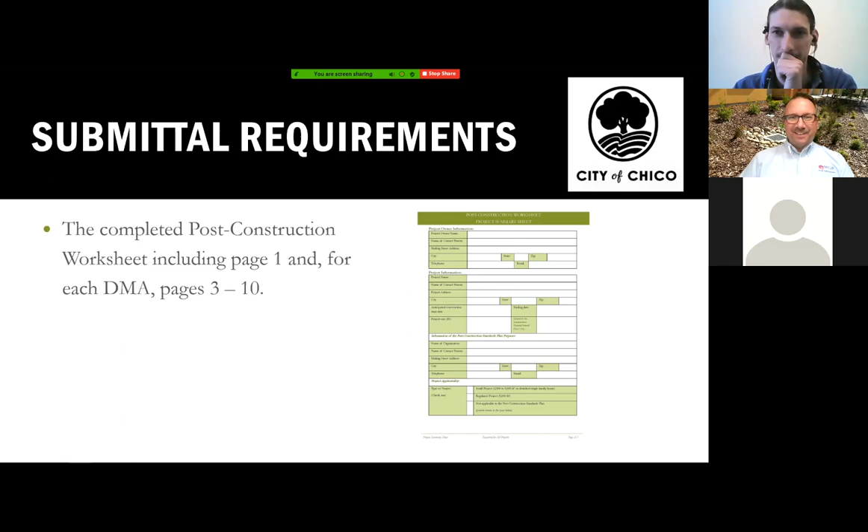Let's see. Maybe drag that over. All right, where did it go? I practiced all this before. Let me find it. Here it is. It's just hiding behind the screen. All right, Jonah, can you see that okay? Yes, I do. All right, good.

So there's the different sections of this, and one of the things we ask is just complete this form completely, and I'll show you there what might be applicable, what's not applicable. But sometimes we do get this worksheet submitted without this front summary sheet. So it's really important to get this for every project, whether you're a small or a regulated project, so that we know who to contact and some basic information about the project.

So we only need one of these. Later on, you're going to see that there's a section of this form that we need for each DMA. But this front project summary sheet is just for each project. And then check which type of project you are. Are you a small? Well, if you're a small, that means you're under 5,000 square feet of new or replaced impervious surface. And we will be reviewing that differently than a regulated project, which is 5,000 square feet or more of new or replaced impervious surface.

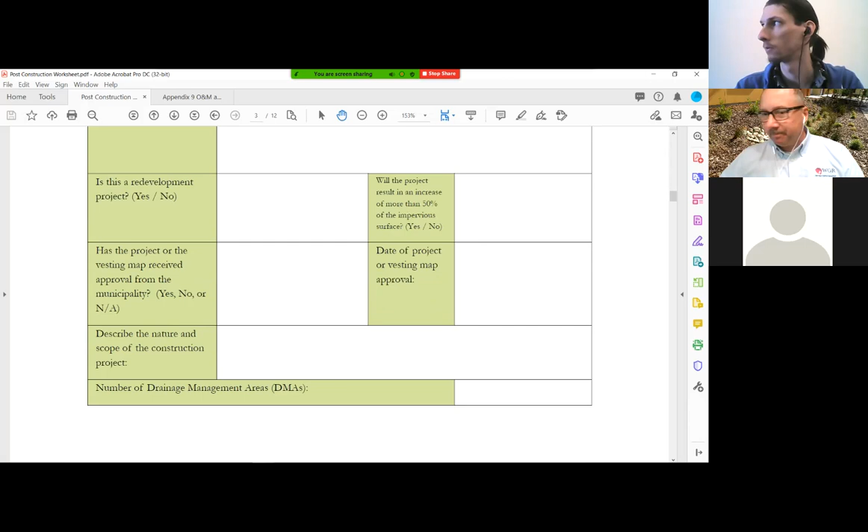And we'll talk about this 50% redevelopment rule here in a moment, and then just provide basic information. But another thing here is, how many DMAs do you have, drainage management areas? Excuse me.

So the next section of the worksheet is for those small projects. So as I mentioned, if you're between 2,500 square feet and 5,000 square feet of new or replaced impervious surface, then you are a small. And that's treated differently. It's less onerous. Basically, you just have to pick one of these design measures, and it will almost always be tree planting because trees are required in most projects.

And then you need to use that calculator, that water balance calculator that was developed by the State Water Board. It's Appendix 5 of the Post-Construction Standards Plan, and basically just quantify the reduction. But one of the things about this is, at this time, the municipal stormwater permit that the city is subject to does not require a goal to be met for the small project.

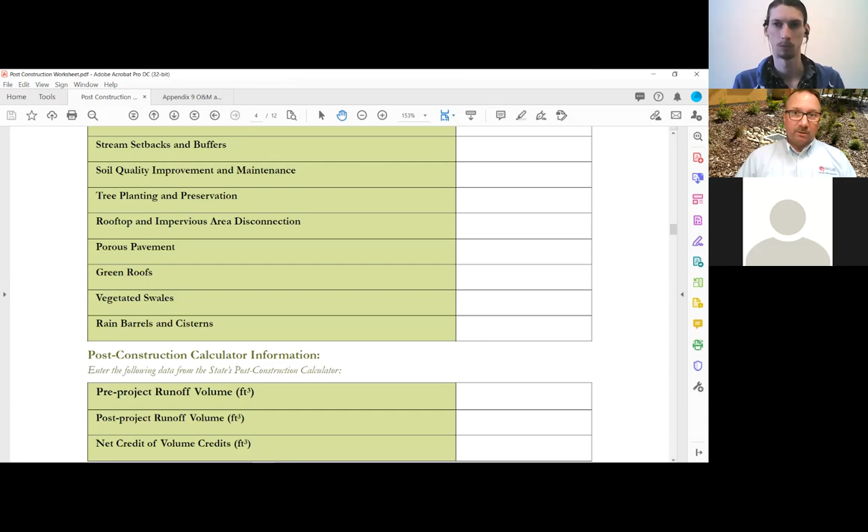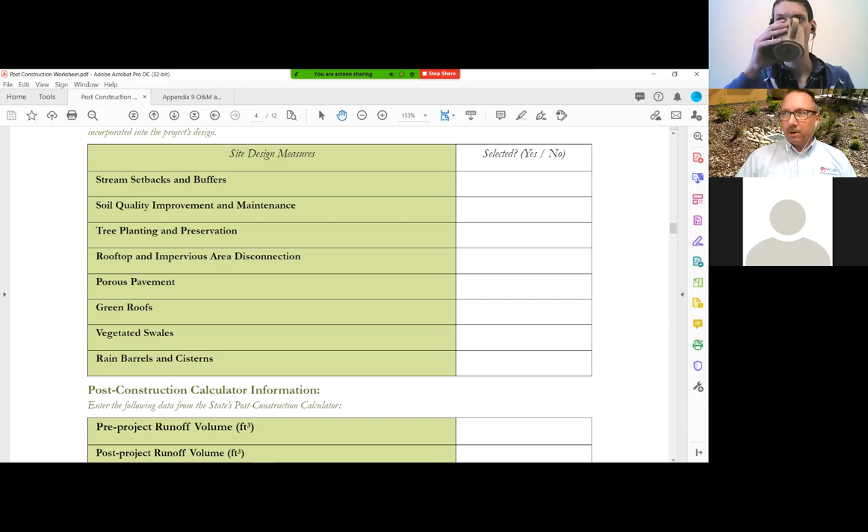It basically just says pick a low impact development measure, one of these site design measures, pick one of them, quantify it, and give us the data for that quantification. But there's no goal to be met. As opposed to if you've used that very same calculator as a part of the State Water Board's construction general permit, and it's now incorporated into SMARTS. There is a goal to be met with that one, but for the small projects under the City of Chico's program, for their permit, you just have to pick one of those measures and quantify it.

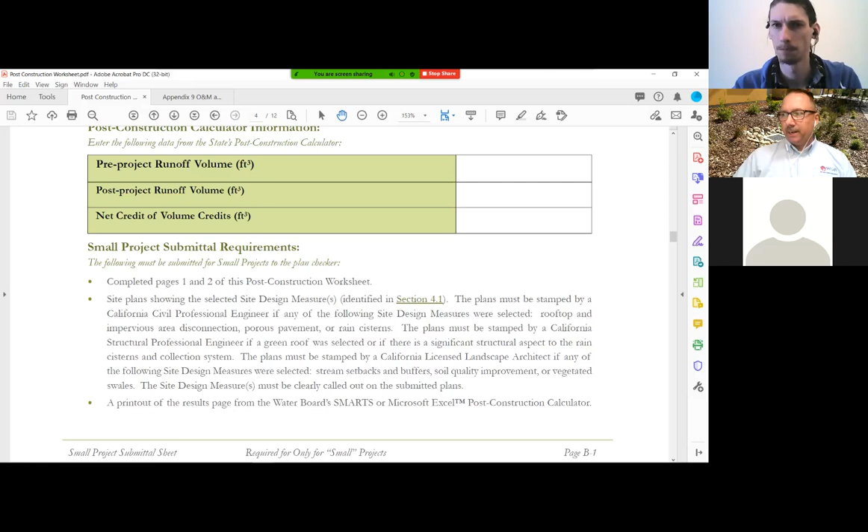And right here, we summarize what's needed to meet that submittal. But basically, this sheet, that previous project information sheet, and then a printout of that water balance calculator is all we need for a small project. And I think typically we don't review small projects. They're easy enough where Rich and his staff are reviewing those, so they don't even come to us.

Regulated projects, though, is where we want to spend most of our attention today. And so again, you complete that first page or two of basic site information, project information, but each drainage management area then is going to need this next section. So if you only have one DMA, then you just need one set. But sometimes, in fact, I think we're going to show you an example of one that has 14 DMAs. Then I need 14 sets of this next section.

So you need to give us the name of the DMA, the square footage in that DMA, and then each one of these subsections are applied to that DMA. So here's another area where we sometimes see some confusion. It's about these source controls. Remember, this is for that particular DMA, and it may change from DMA to DMA at a project.

For example, if we got an apartment complex going in, only one or maybe a couple of the DMAs will have the refuse area where the trash enclosure is located. So if it's in that DMA, then you would select yes for that one. If a certain DMA has no landscaping in it, then you would not select yes there.

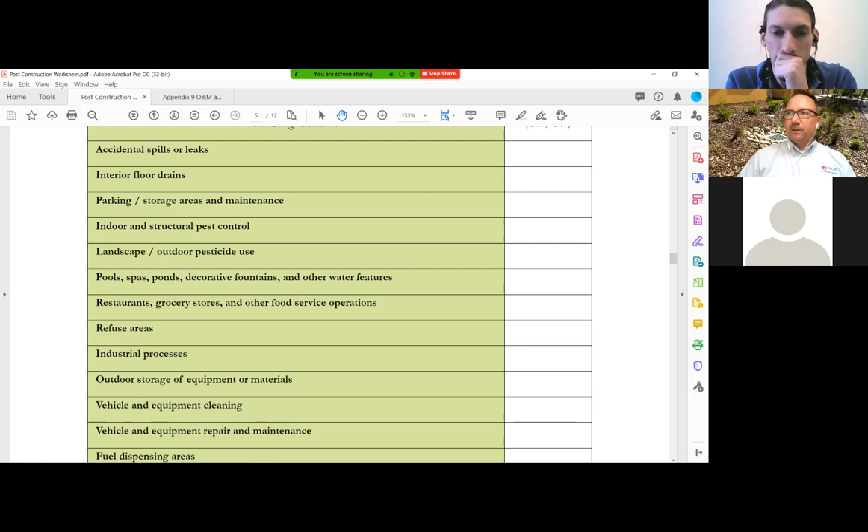Accidental spills or leaks right here. You know, how does that go into a design? Of course, a spill could happen anywhere at any time, really. So we don't get too over the top concerned about this.

If you have a large parking area, and it's feeding into an underground infiltration device, then maybe we're concerned about a spill of fuel or oil getting into the infiltration device, and we'd like to see some sort of spill control for that. Your design measure might be as simple as having a spill kit available, especially for a commercial or industrial site, or a spill resource closet built into it.

But we don't typically get too crazy about our reviews on that type of thing, especially if it's more like an ongoing activity thing. Interior floor drains, the only thing I'm looking at is that they're not tied into the stormwater system, but that would be against code anyways, typically speaking. Interior floor drains aren't to tie into a stormwater system. Sanitary sewer system, that's fine, or a wastewater system, that's fine, but not into the storm system.

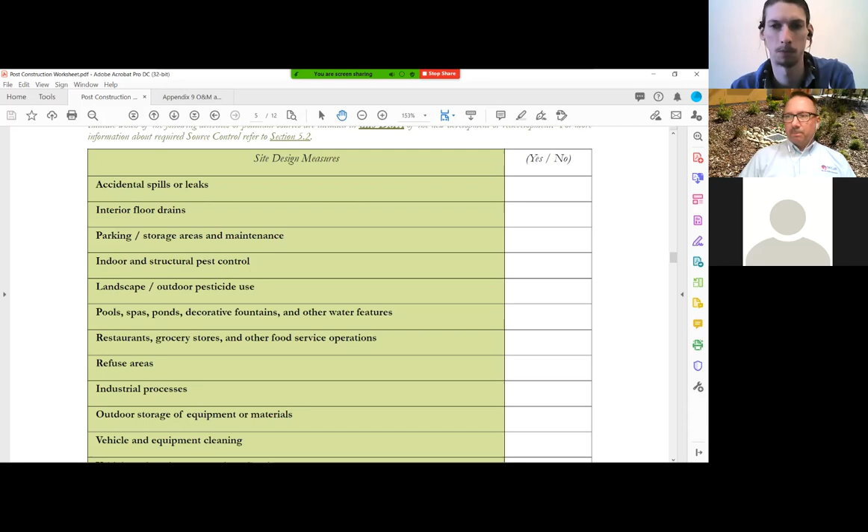If you have a parking area, then you're selecting that. Again, pest control, to me, that's more activity based. So typically, I'm not going to be too concerned whether you check that or not. If you have a pool, a spa, or a pond as a part of the design, then you want to check that. Or if you have a food service type of operation in a particular DMA.

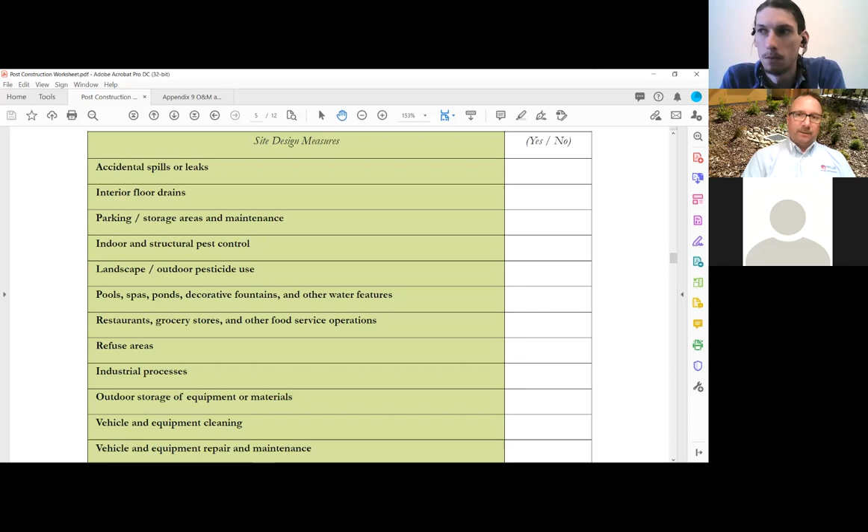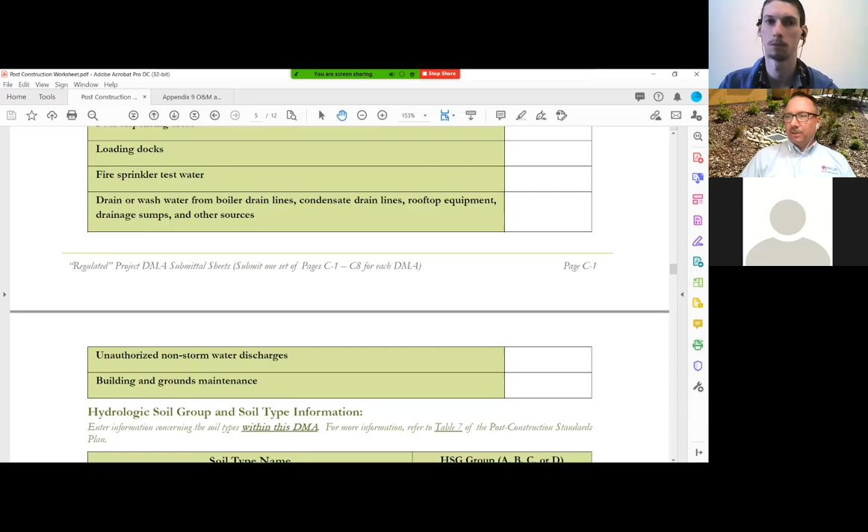So sometimes we'll review gasoline stations that have a convenience store with a food service part of it. If that C-store / food service area is in a certain DMA, then you would select it for that one. But if you have another DMA that is mostly the outward landscaping areas, then you would not select it for that DMA. But that's kind of our concept on these. I won't get into any more of that unless you have specific questions.

The next section that's really important to select is your soil type, your hydrologic soil group, or HSG. Basically, we want to see if it's an A, B, C, or D, or mixed soil types on your site. If you have one soil type, then we need to know that. If there's multiple soil types, we need to know that, especially if they have different HSG types.

So if part of the site is A and then part of it is C or D, that's going to be something we really take a look at, because of course we're going to want to see the infiltration or bioretention happening in the A type soils on that site rather than the C or D. And that's because the permit requires us to have infiltration occurring there.

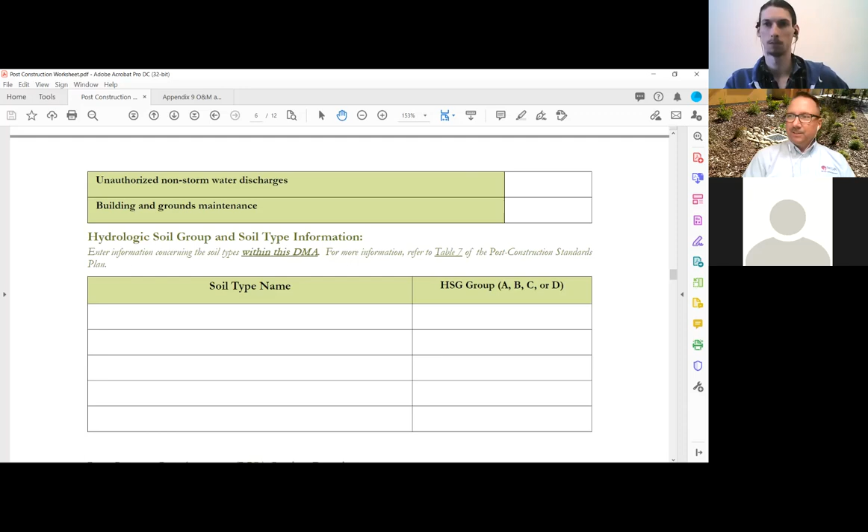Now, when this permit came out, it's been out for a while now, maybe 8 years plus, we thought this was going to be more of a big deal than it was. To be honest, most of the reviews that we've done, the sites either all have the same HSG soil types, or the developers already put the infiltration into the higher infiltration area. So I have not found this to be an issue in most of the projects that we review.

Now, another area that needs to be handled on a per DMA basis are the 9 LID, or what I like to say, essay questions. This comes right out of the permit. We were obligated by the permit to address these for new and redevelopment projects that are regulated or over 5,000 square feet. And so from the very beginning, we felt it was just best to deal with it by saying, okay, how are you addressing this?

Again, I thought this would be a bigger issue in the reviews, but we have found it not to be a big deal at all. I don't know if I have rejected hardly any projects due to any of it. Sometimes there might be a question here about soil type. Sometimes it might be, well, I'm seeing something slightly different on the web soil survey than what you're saying here. Could you clarify?

But typically, I haven't seen a lot of projects with problems answering these 9 questions adequately or with any real challenges in meeting it. So I won't spend a lot of time this morning covering this, just because we haven't seen it be a problem, unless you have a specific question.

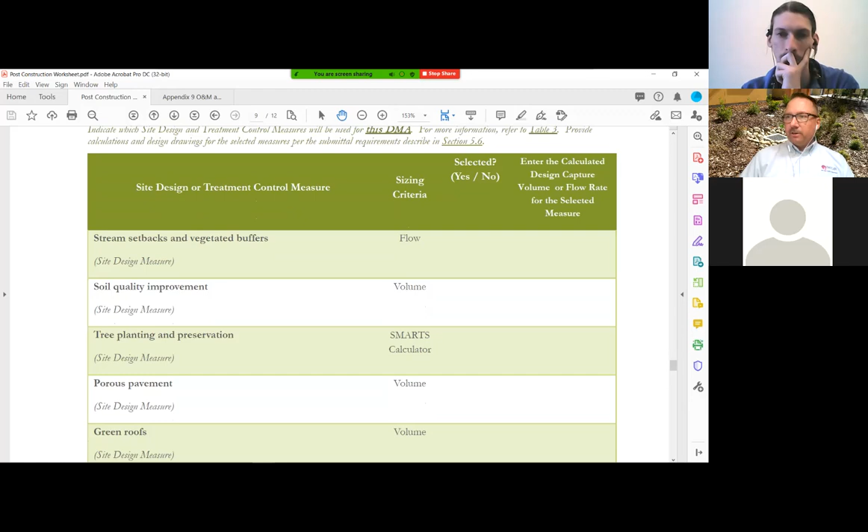And then this next section is where you select your treatment control measures. And you'll notice that under sizing criteria, we have flow or volume, or in some cases, both. I think down here for infiltration trenches or flow through planters. It's either or. That sizing criteria we refer to in the post-construction standards plan as a storm design volume, or SDV, or storm design flow rate, SDF.

We'll talk about that more in a moment, but most projects we're looking at the volume. Only if we're doing a flow through type of a situation, and we had one recently, in fact, I'm going to show that here in a moment, it's going to be SDF, which is 0.2 inches per hour will be our treatment goal.

Now, under tree planting, we show that as being the SMARTS calculator, but it's also built into our volumetric calculator. So if you're calculating the volume goal, we ask a question about tree planting, and that will build into that goal the credits that you get for existing and new trees within each DMA.

And then there are certain variations and exceptions, and we will spend some time looking at this this morning. In fact, a common one that we see. We'll talk about that in a moment. But if any of those apply, then you would want to indicate that for that DMA here. And then there's a list of the submittal requirements, which we're going to look at next. So let me get back to our

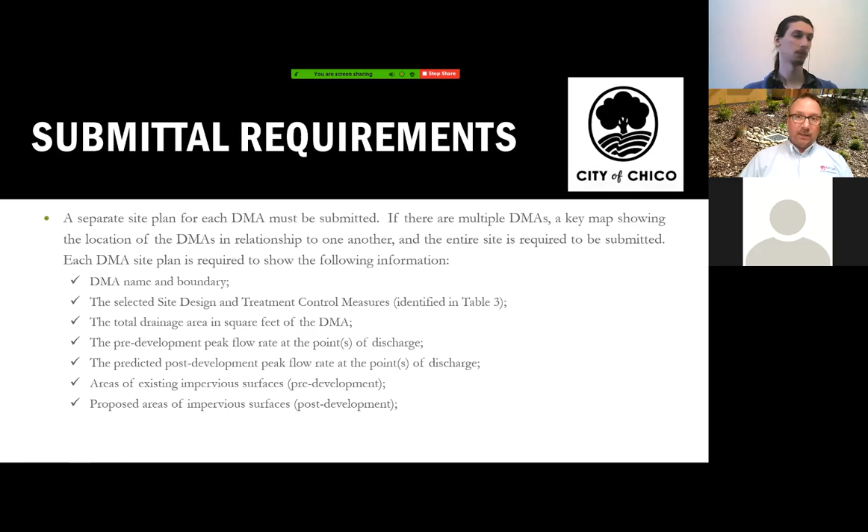Areas of existing impervious surfaces and proposed areas of impervious surfaces. Generally, that's not a problem. Usually that's pretty standard, but just make it clear so we can understand what's vegetated, what's impervious on your drawings, so that we can, in fact, it's helpful many times to include the areas on your drawings so that we can quickly validate it against your calculations provided.

Not too common, but it does happen, setbacks from creeks and wetlands or riparian habitats. And then show your existing topography and drainage patterns and your proposed topography and drainage patterns. Show your soil types. Again, that doesn't have to happen on the drawings themselves, but you do need to have information about that. And then show existing trees so that we can validate your credit, and new trees, and also areas to be protected.

Now, sometimes with the trees too, it might be helpful to submit a landscape plan with that. But if you do that, especially if you have multiple DMAs, make sure that the DMAs are drawn out on the landscaping plan, or you show the trees on the DMA plan, so that we can count up the number of trees within each DMA, both existing and new.

All right. And so your design drawings should just provide enough information so that we can see the area, so your plan view, but also your elevation, or more importantly, a cross section if you have a lot of underground structure going in. So if you have an infiltration trench going in there, I need to know the depth and the width of the trench, how much rock layer is in there, how much soil is on top of that, especially if it's a bioretention area, and how much ponding is on top of that.

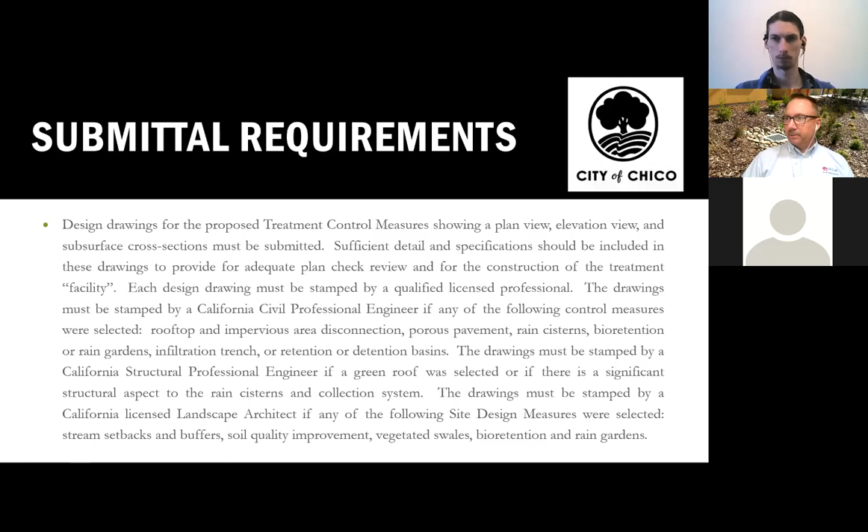And as far as the credits that we allow here, we basically took the same credits that the water board has on their water balance calculator used on SMARTS. Unfortunately, I can't really document where they got those values because SMARTS and the water board haven't really disclosed that, but we're using the same values that the state water board uses.

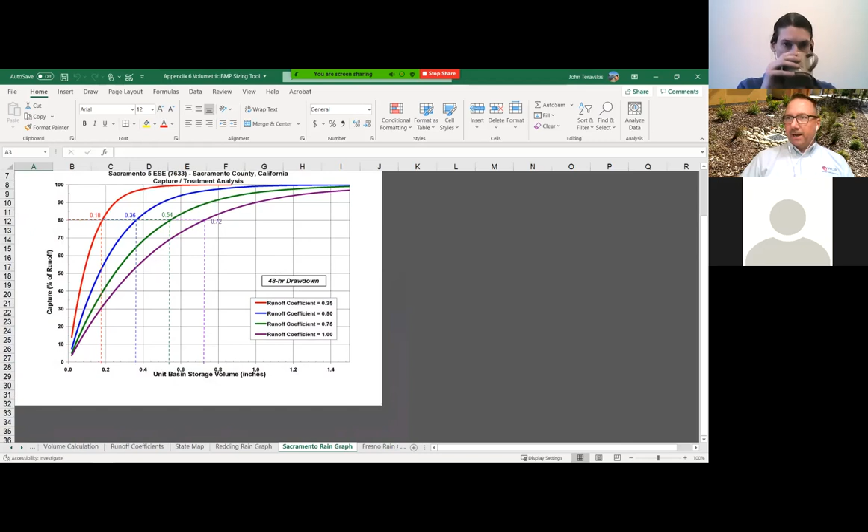Now, how this volumetric calculator works is it's based on weather data, and the process that's described in the city's municipal permit allowed a couple different approaches to be taken to determine this, and I'll go through that in a moment. But one of them was using weather data and using the 85th percentile storm. And what we noticed is that in the Central Valley, as we went from north to south, it was almost a linear relationship. And so we do give you some of the raw data, the Redding graph, the Sacramento graph, and then the Fresno graph. And as we looked at these 85th percentiles, it was almost a linear relationship.

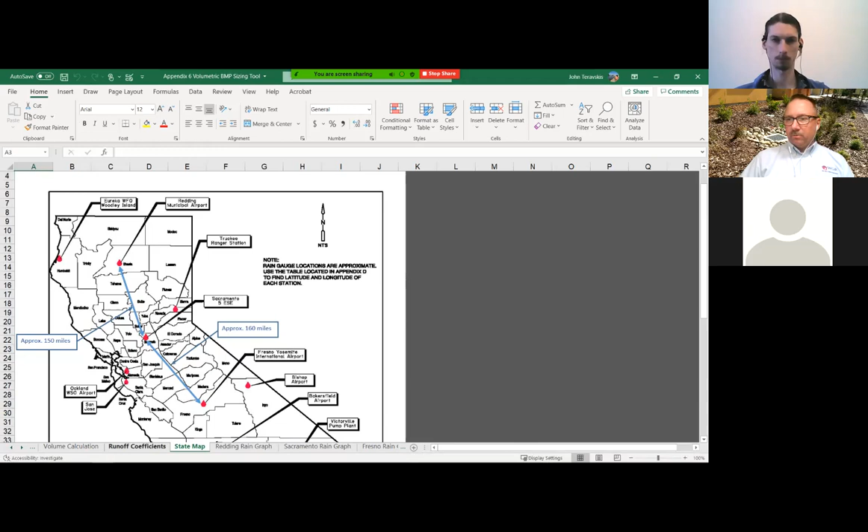And so what we did was we built that into the calculator based on your relative position north and south of Sacramento, kind of as the bird flies. Now, there's a certain tolerance to this. So 5, 10, even 20 miles isn't going to make much of a difference. So you just need to get close. So don't get too detailed about this. You can play around with it too and see it doesn't make much difference.

But a project occurring in Chico certainly has a different goal than a project occurring in Sacramento or one that's occurring in Fresno. And so you will designate your position, which for Chico will always be north, obviously, and your distance from Sacramento, and I'm blanking, but I want to say it's like 60 miles roughly north of Sacramento. And so you enter that in, and that's going to give us our percent of distance.

And basically what that's doing is going off of these runoff coefficients off of those curves that we were looking at. So you can see the linear transition for each runoff coefficient here with each of the weather stations, and we get our unit basin storage off of that based off of, let's say, this graph right here, unit basin storage for the different runoff coefficients. You can see where we're getting that. And you can see that Redding will have the highest, Fresno has the lowest, but we also have the 4 different curve numbers we're working with here.

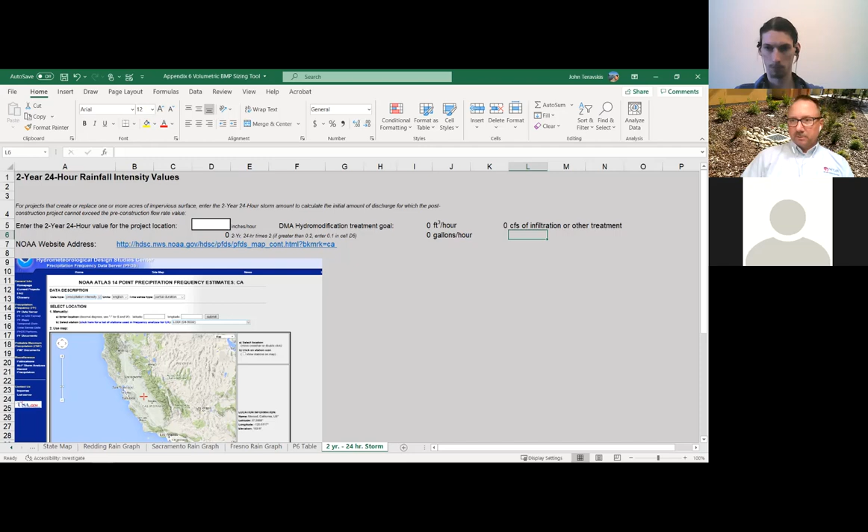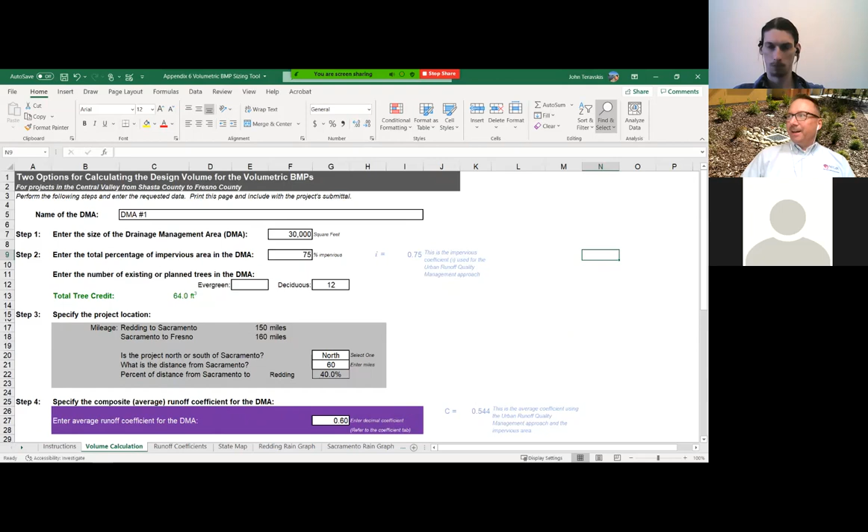But yeah, I'll look into that. I didn't know about that. I'll see if I can find another source or find out when it's going to be back online. All right, good. Let me go back to what we're looking for as far as submittal requirements. So

how we prepared this post-construction standards plan guidance is basically we put the onus on the professional engineer. I'm just there to make sure that all the boxes that need to be checked are checked, that your application is complete, that I'm getting the same number for the SDV as you are, or the SDF, and that your calculations and your drawings are supporting that.

But, you know, I typically will not question the professional engineer if you say that, for example, the voids in your soil or your rock is 40%, and you've stamped that, then we're going with 40%. The only time I'll question it is if it seems to be completely in error or not supported by other information, or it's a typo or something like that. But if it's within the realm of reason, you're the one stamping it, you're the professional signing it, we're going to go with that for that type of thing.

So typically, I'm not questioning your design. I'm just looking at what you've submitted and making sure that it is adding up, both what's on the drawings, what's in the calculations, and that you've provided us all the information that we need.

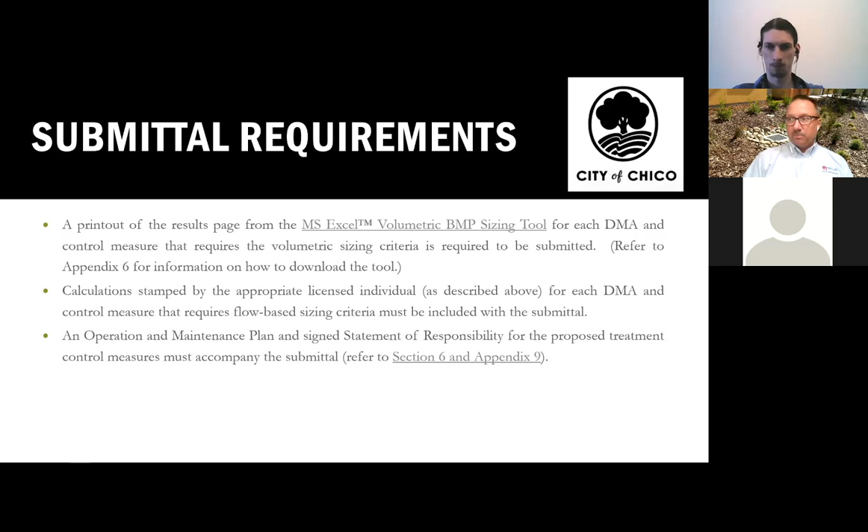And then one of the other things we need, as we'll talk about in a moment, that's often forgotten or not submitted, is the operation and maintenance plan and the statement of responsibility. And you can see that here, right here. So it's Appendix 9, and it's a form as well. And then the statement of responsibility.

Now, sometimes the statement of responsibility does not need to actually be submitted, and that's for a case where the city is going to have the responsibility for the maintenance of that, or going to take ownership of that treatment device, especially if it is going to be deeded over to the city or is in the city right-of-way. Then a maintenance agreement, or a maintenance district, is going to be applied to that; that will typically be the case. You just need to let us know that. I will verify that with Rich, and then we'll consider that section met.

All right. So let's talk about the review criteria now. So as I mentioned, my first job is just to look and see if the application is complete. Do I have all the pieces I need to be able to evaluate it? Was the O&M plan submitted? You are charged for each of these, and maybe Rich can talk more about that. I don't know all the details of how that works. But you're charged for each review, or at least we charge Rich for each review.

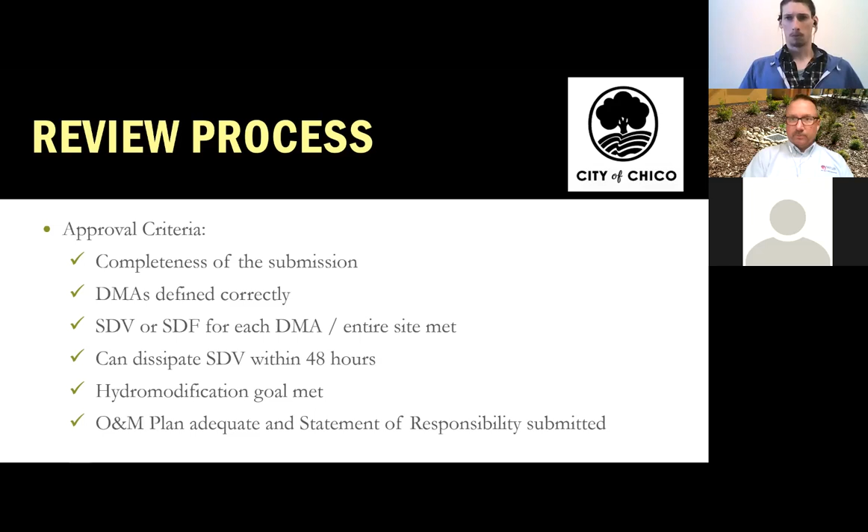Then the next thing we'll check is which type of sizing criteria was used for each DMA. Now, here's another reason why a DMA might get separated. One treatment system, a bioretention cell, for example, is going to be typically volumetric, whereas maybe the roof drain going to the north side is going into a grassy swale, and that's typically flow based, so it's going to be an SDF. And so if you're using different design criteria, that is definitely going to mean it's two different DMAs. So we want to make sure that the SDV and SDF were appropriately chosen. I'm actually going to show you an interesting project today where they used both and both were met.

And then the other thing we're looking at is not just was it sized correctly, is the SDV being met or the SDF being met, but can that SDV dissipate within 48 hours? That's the goal. It needs to infiltrate or dissipate within 48 hours. Now, if there's soils that don't allow infiltration of the SDV in 48 hours, then you may use one of the alternate designs, which we'll talk about in a moment, which is identified in the plan, and which is usually a subdrain.

We'll also check to see if the hydromodification goal was required and if it was met, and that's like I was mentioning, 1 acre or more of impervious area being added, not replaced, but added. Then we're going to look at that 0.2 inches per hour, the peak flow rate for that 0.2 inches per hour pre and post, and the post can't exceed the pre. And then, of course, we're going to look at the O&M plan to make sure that it's adequate.

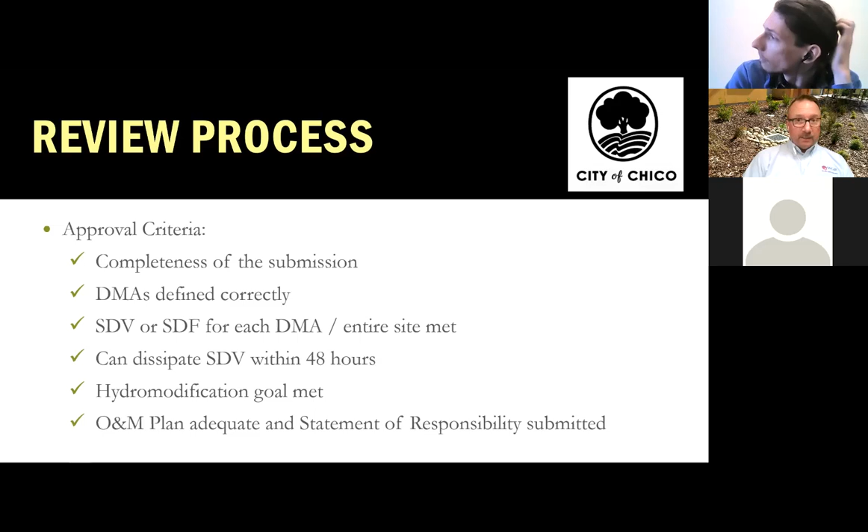Because how those plans and the statement of responsibility are used is that the city has a requirement that once a year, they need to send out a self-certification card, basically a postcard, to the owners of these devices to ask 3 questions. 1, are these treatment devices that were built into the project still there? 2, are you inspecting them as you said you would in your O&M plan? And 3, are they performing as designed? And as long as you answer yes, yes, yes, then that's good, and you won't see another card until next year.

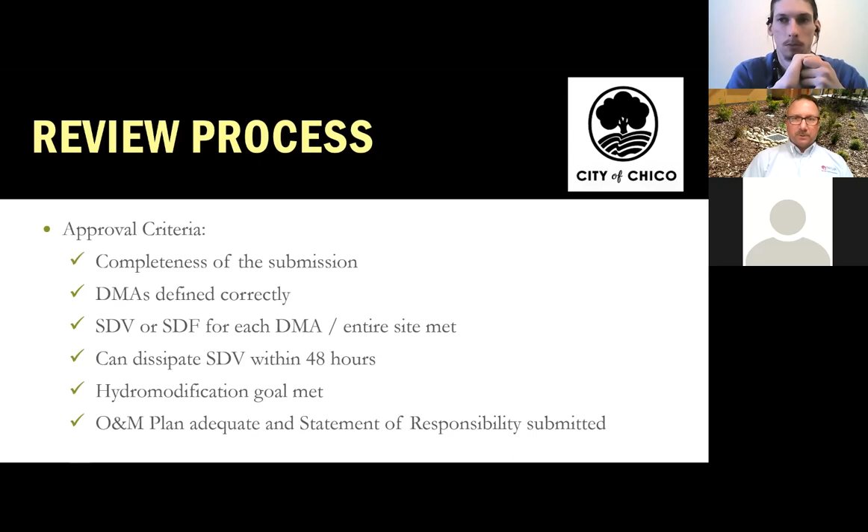But 20, 25 years down the road, maybe it starts to plug up. If that is the case, then it's going to be expected that the owner of that property take the maintenance that was spec'd out by the professional who designed it. We see it as real important to tell your clients basically the maintenance expectations. This isn't something that you just put in the ground and forget. Yeah, maybe you can forget about it for 5 years, a decade, or even more. But at some point, just like blacktop asphalt, you're going to have to replace it or maintain it or change it. So it will have a life expectancy, and that needs to be communicated to your client.

All right, so let's look at now 4 different reviews I do, and I want to just check on questions. Anybody have a question before we move on? All right, and let me double check how we're doing on time. All right, I think we're doing okay on time. Let's take a look at these. So again, if you have to sign off because of time, we are recording this, so you could always come back and watch a recorded version of this.

So let's look at an infiltration trench that had both SDV and SDF in it. This is a very recent project that we've been working on. Notice that it has 1 DMA. First off, let's take a look at how we do this documentation. For any submittal you get, you're going to get the spreadsheet submitted back to you with some basic information about your project. Plus, we're doing our own independent verification of your calculations, and hopefully we can come up with the same number that you did. Let me just explain some of the information that you'll see on here. So just some obvious basic information about your site.

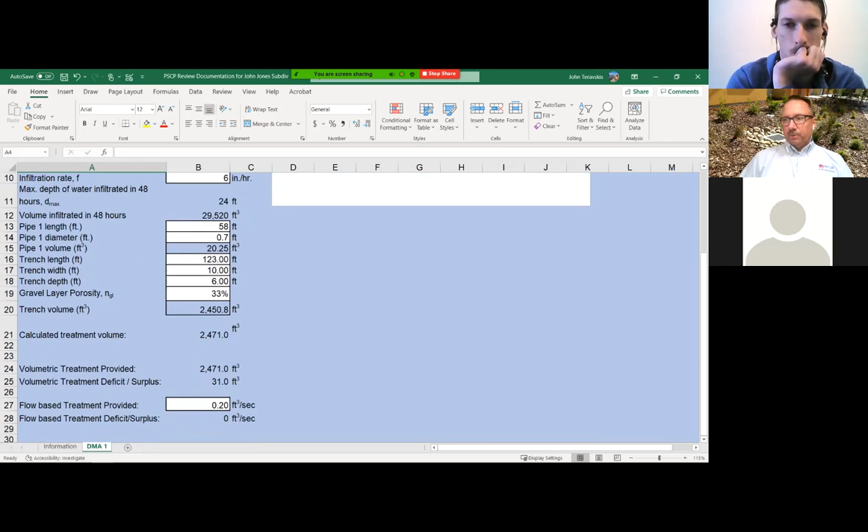They go, no, we were trying to do the SDF. And so I took their numbers, looked at what they were presenting, and again, they were just slightly off, even with the SDF. So that was kind of interesting because this was my first real live example where we were looking at both, and I was finding that both were correlating very similarly. So when they just slightly upsized their design, not only did they meet the SDF goal, they met the SDV goal too. So I actually calculated both here using the numbers they provided. And you can see here that the volumetric goal had a slight surplus, and the flow through was met. So that was kind of an interesting project.

So you will get this documentation returned to you with either how you met it, or if there's a question or a problem, I will typically highlight whatever cells are in question in red, and then you'll have some review notes here about what I'm looking for. All right, so let me put that one away, and let's take a look at a bioretention one with 3 DMAs.

So again, I won't go through all of this here, but just like you said, let's take a look at these DMAs here. So many times I will also clip in a cross section or supporting information into it just to further document what was done. But you'll notice that we have the DMA area, the impervious area, the percentage for that. And then I plug this in from the calculator, the volumetric calculator.

So usually you'll give me a printout of that, and so I'll take that number off of there. I don't necessarily do it every time, but if I have a reason to double check a number, I might do my own water balance calculator, Excel spreadsheet, and send. If I do that, and especially if there was some sort of discrepancy, I might send that back with the review documentation. Or sometimes I do that because I see an advantage to the developer.

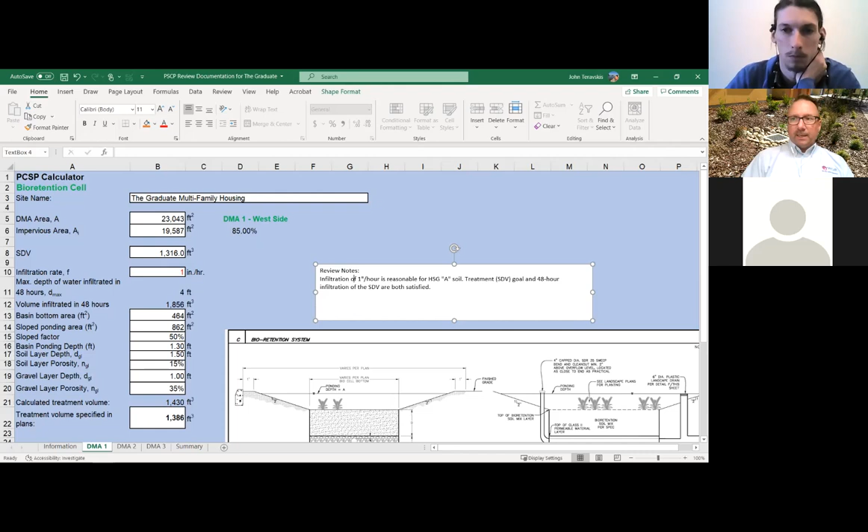We're looking at your ability to dissipate water within 48 hours. We're not looking at how fast water will move through your treatment device, through the sand layer or the rock layer. That by definition in the plan has to be at least 5 inches per hour, and as long as you go with engineered soils, it should be. But we're more, okay, can you dissipate this SDV within 48 hours? And if you can't, that's not the end of the story. That means we might be able to do something creative with that.

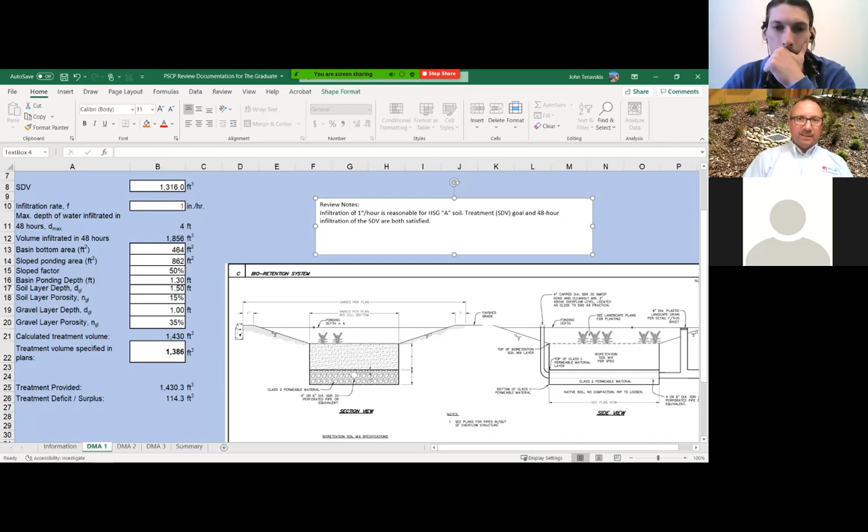Now, notice that if they have an underdrain here, now this one was a little bit different, but if you have an underdrain in there and you can't meet that 48 hours, that underdrain is going to be allowed. But let's say you're in A soils and you can easily meet that, then we're not going to want to see an underdrain that is tied right into the municipal system, because that's kind of, in our minds, a hole in the bucket, and you're short-circuiting your ability to treat that SDV.

By the way, Jonah, I've been hogging this whole thing. You do a lot of reviews too, so I want to just let you make comment too. So feel free to interrupt me. I should have said that quite a bit ago.

No, you're fine. All right, and so we're just basically taking these numbers out of your plans. That's why I said you need to provide us these numbers so we can clearly see them and put them into ours. And also, this here in the blue, calculated treatment volume, is what I'm calculating.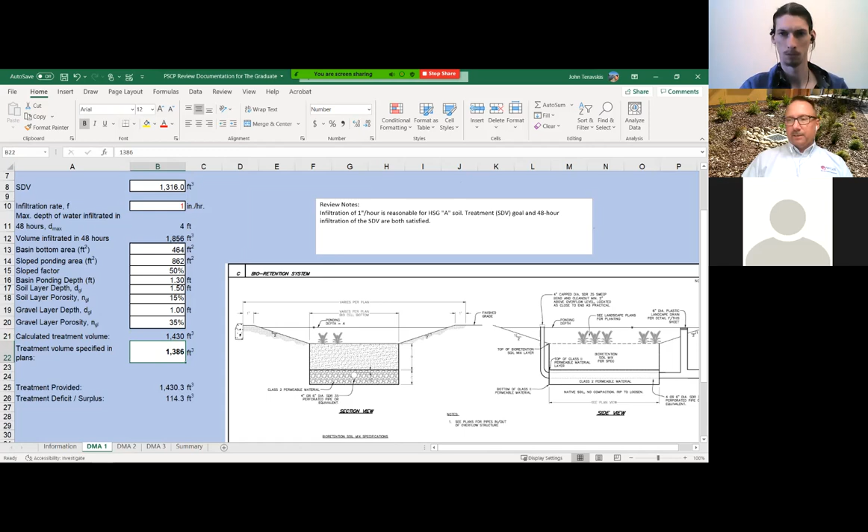And this is coming out of your plan, so we enter this based out of your calculations. And here I actually came up with a little bit more credit than this developer reported, and that's good as long as it's equal or greater. My calculations of yours, we're going to say, all right, that's good. And so each DMA we do that for.

And then on the summary, in this case, we had 3 DMAs. Here's the SDVs for each DMA, the treatment provided. Notice that there's a surplus for each of them. Let's take a look at another one where we might not have had a surplus. I think that's the last one. Before we get there, here's the one with the alternate design.

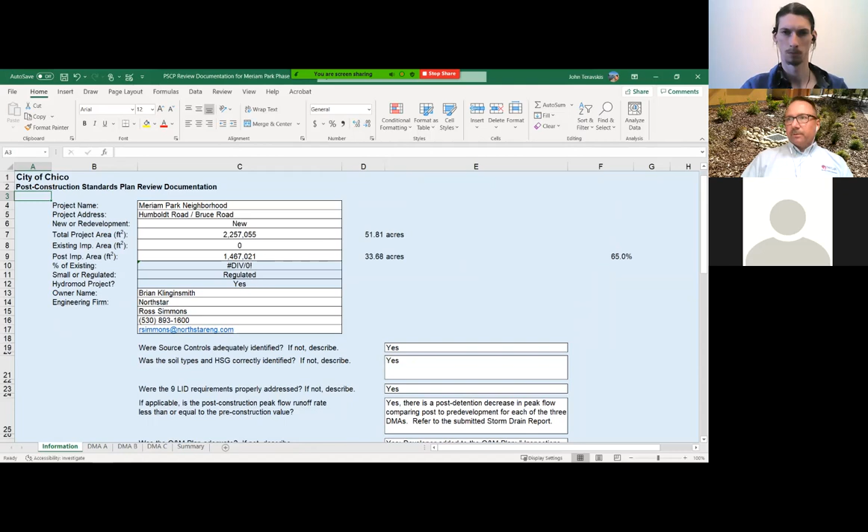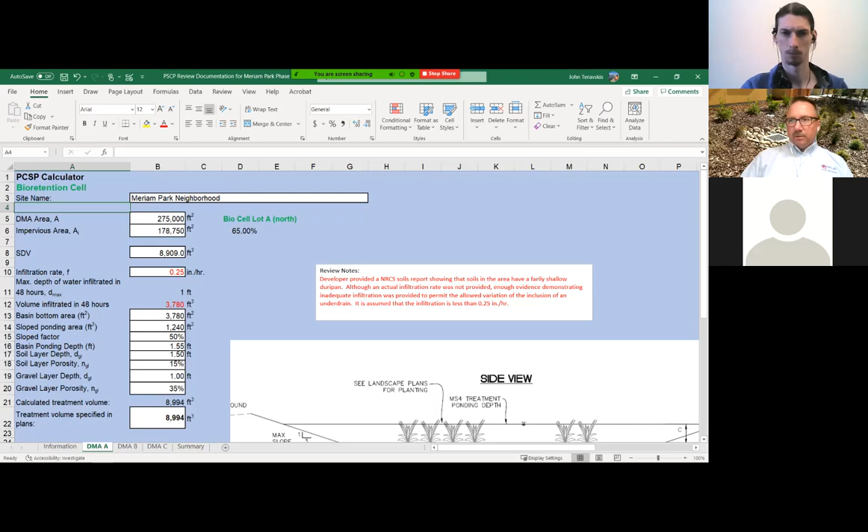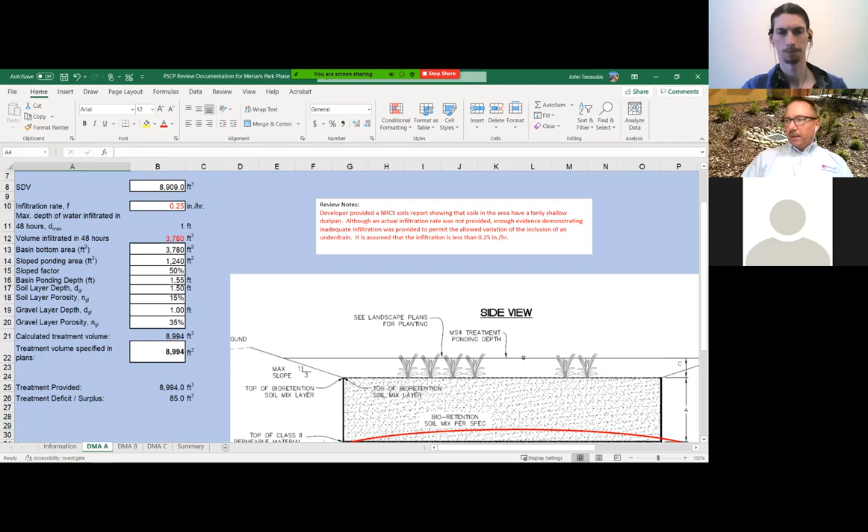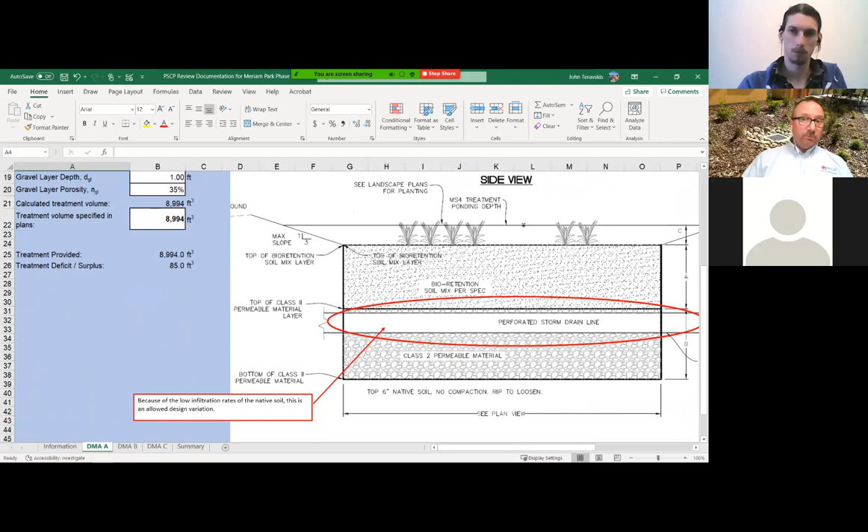Yes. All right. So here's a case where we had D soils, low infiltration rates, and notice that in 48 hours, they were below the SDV. So that means we can allow this to be installed. Because of the low infiltration rates, this is an allowed alternate design. So you want to make sure you've also checked that on your worksheet. We showed that earlier, but that is an allowed alternate design because the SDV cannot be dissipated in 48 hours.

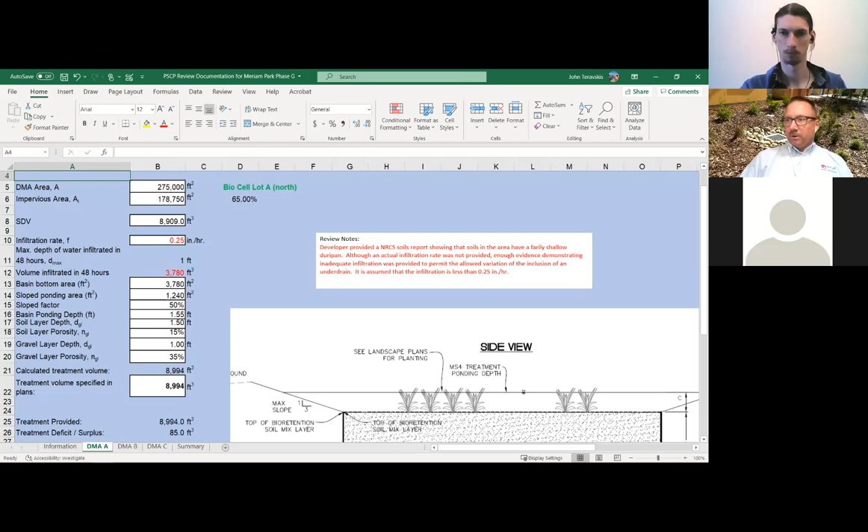So this brings up an important point. Many times we get asked the question, well, we're on soils that can't infiltrate anything. Do we really need to meet the SDV? Well, yes, you do, but you're allowed an alternate design to offset that. And so you can have those subdrains. So, okay, not much is going to go into the native soils, but once this saturates and ponds, then it's going to take it off-site. And so you can either have this or you can have an elevated drain inlet.

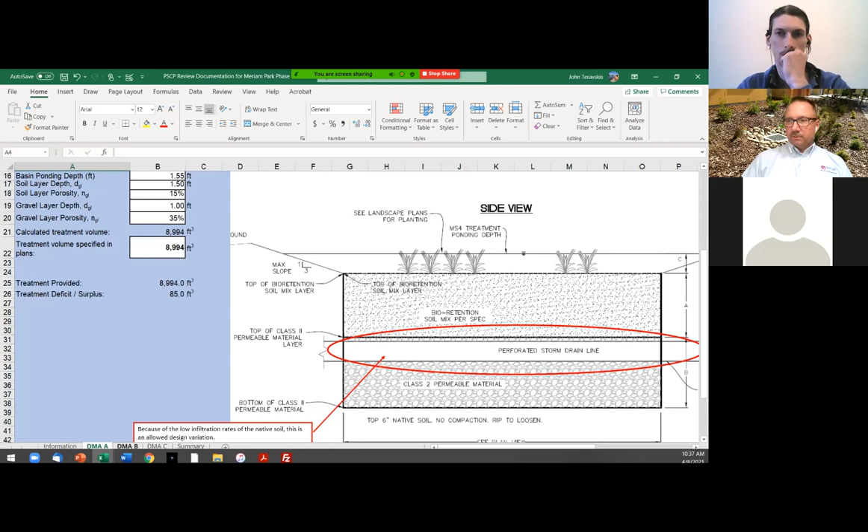In fact, you can use the elevated drain inlet even for a site that does allow it to infiltrate in 48 hours, because what that means is that drain inlet is then above your SDV volume. And so any flows that exceed the SDV then go into the drain inlet and offsite. And yeah, the same for all 3 of these. And so in this case too, each DMA had a surplus. And so it was met.

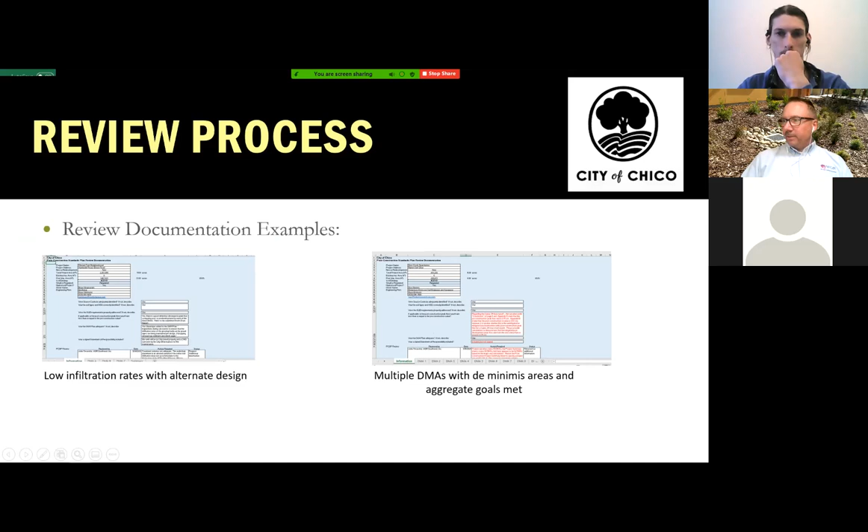This last one here that we're going to cover today, before we go into questions, I think is actually... Yeah, I know this one. You know this one, huh? Yeah.

So it's actually, we're still working on this one. But I did want to bring this up because it has a de minimis. And I believe it was DMA 14 we threw it into. Yes. So this is a good example of what we might do on a review. In this case, no treatment was proposed for this DMA. But in this DMA, when I looked at it, I noticed that they had 12,900 square feet of sod, basically, or landscaping.

So I said, okay, what if that was on just 3 inches of good soil? And so we put that in, a 1/4 foot of good soil with even a fairly low porosity, 20%. And so doing that just with our landscaped area, notice no ponding or anything like that, no gravel layer. So just a self-treating area. We actually came up with a treatment volume of 645 cubic feet. And that was because in this DMA, it had the ability to do that.

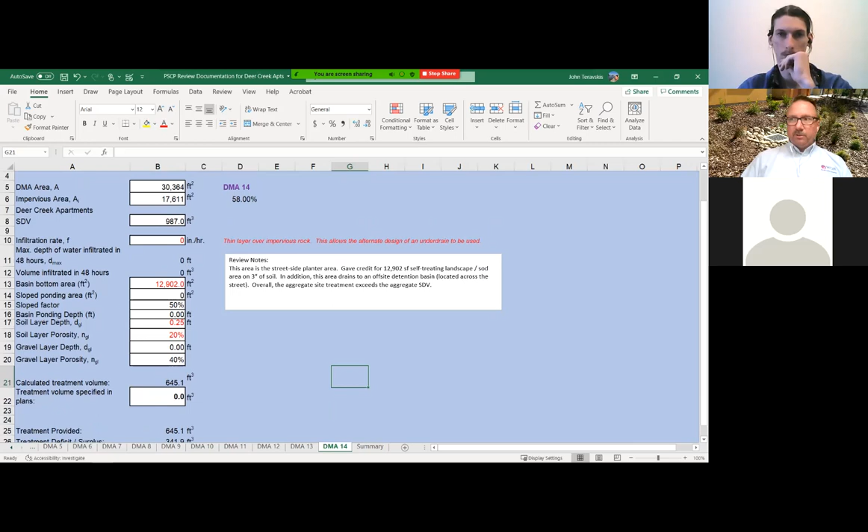As I mentioned earlier, you could have a DMA that's really small, that's basically a driveway, and there's no ability to treat anything. And we'll talk about that in a moment. But you'll notice that the SDV for this is 987, but the treatment, in fact, they were saying 0 initially, but I, using this, came up with 645, so at least partial treatment.

So if we go to the summary, this is basically what I wanted to show. They were showing a surplus in all their DMAs except this last de minimis DMA, which was right on the, in fact, if we come down here, you see DMA 14 right along the street, not a lot of opportunity to do treatment except the self-treated areas with the landscape.

So that actually had a negative value for that DMA, but the aggregate SDV is 17,300 cubic feet, and the treatment provided is 20,600. So they're more than treating the goal, and they have an aggregate surplus of almost 3,300 square feet, or I'm sorry, cubic feet. So we accepted that.

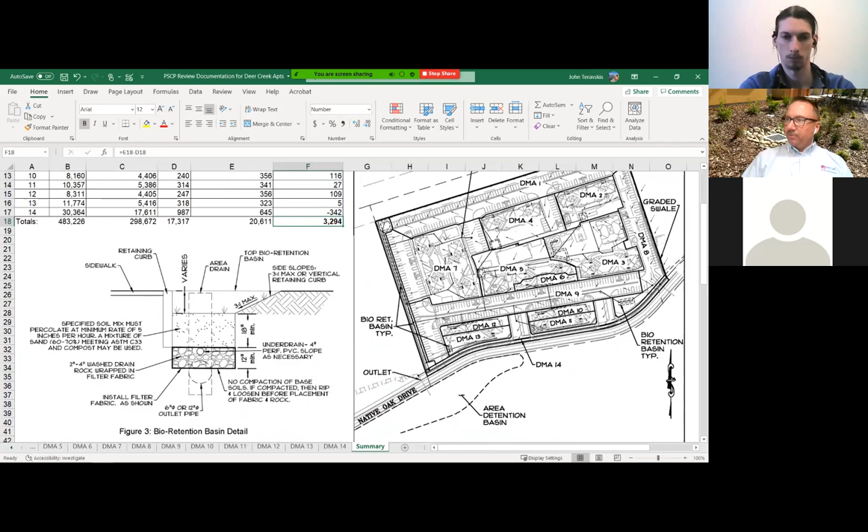Now there are some municipalities that get very over the top about every DMA being met, but we felt that this is protective of water quality, that this meets the goals of the municipal permit, and City of Chico accepts this. But you can see, in this particular one, this is a good DMA map. It shows the infiltration devices, it shows the DMA locations, and then we have a good cross section. So they gave us lots of good information to be able to do this.

Now, if I do something like this, typically I will turn it back and say, I conceptually recalculated it this way, but please verify if this is the case. And even if I'm giving you favorable credit, I want you to go back and verify that that is acceptable, because you're the professional, you're the one stamping it. All right.

So again, common problems. The number one problem that we turn it back for is the SDV or the SDF were not met, or were not correctly identified and not met. The hole in the bucket, that's another common one, is where the alternate design wasn't allowed and a subdrain was put in. The infiltration of native soils was not provided. That's really important because we need to be able to verify that you're dissipating in 48 hours.

Another one is the hydromodification goal was not realized as something that needed to be met, or was not addressed at all, or was not met. And then probably the other reason we turn it back is just not enough information was provided for us to be able to independently validate your numbers. And then the O&M plan or statement of responsibility was not provided or was incomplete for some reason.

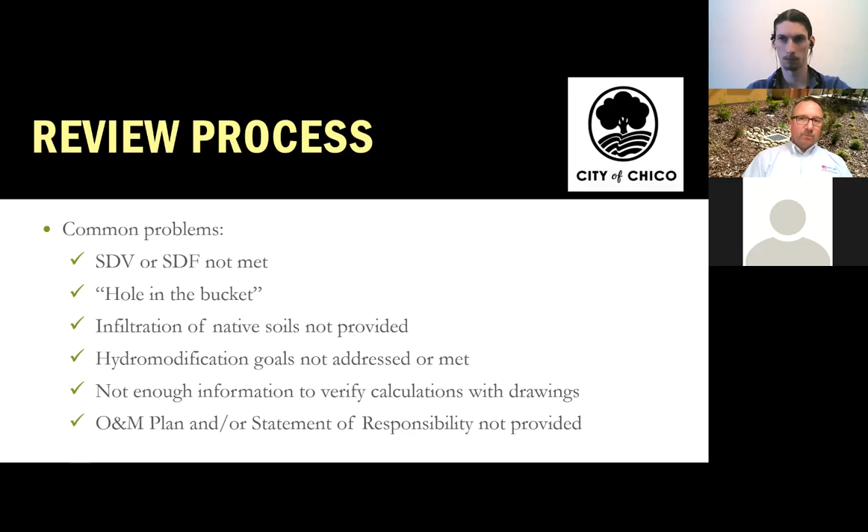So if you have questions at any time, you can contact me or Jonah. We're happy to talk to you. If we're doing the review, you're going to get our contact information, and you can call Chris or Rich at the city first if you want, or call us if you have questions. Now, we do ask that all submittals go first to the city and that they send them to us. We found that it causes confusion when developers start sending them straight to us. So we ask that you go to the city first, and then they'll direct it to us.

Rich, anything you want to bring out? Something you heard in our presentation, or something you want to bring up? Yeah, John, you pretty much nailed it, but I would like to add that on the O&M plans, we record those against the property. So we do need to obtain a title report, and if it's not held by an individual, we'll need the articles of incorporation. And then for the development projects going through the development part of the city, our development engineer is going to start requiring, as part of the soils report, that you do an infiltration test. So we actually have the real numbers.

That's about it. Okay, if you want any information, take a screen print of that, or just shoot that screen right now with your camera, and email me. I can email you a copy of notes from today. We have a PDF copy of the slides we just covered. I can email you if you're missing some of the worksheets or the calculators. So if you're just needing some information, send me an email, and I'd be happy to do that.

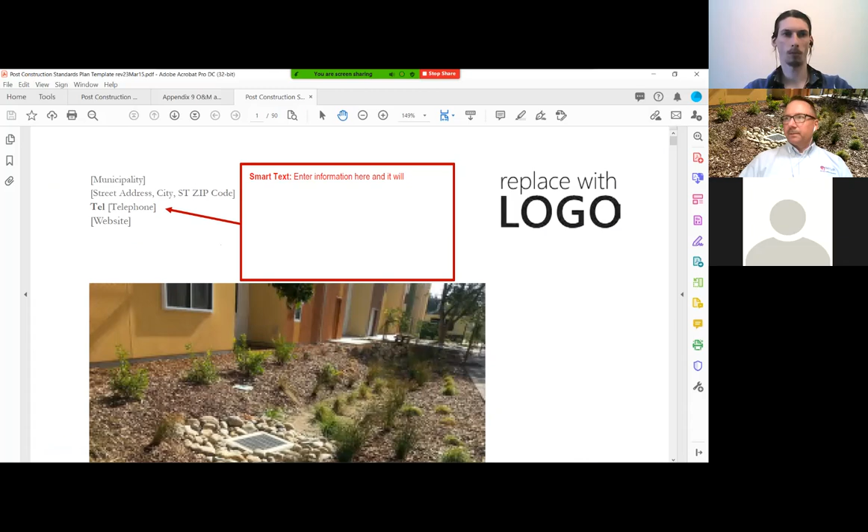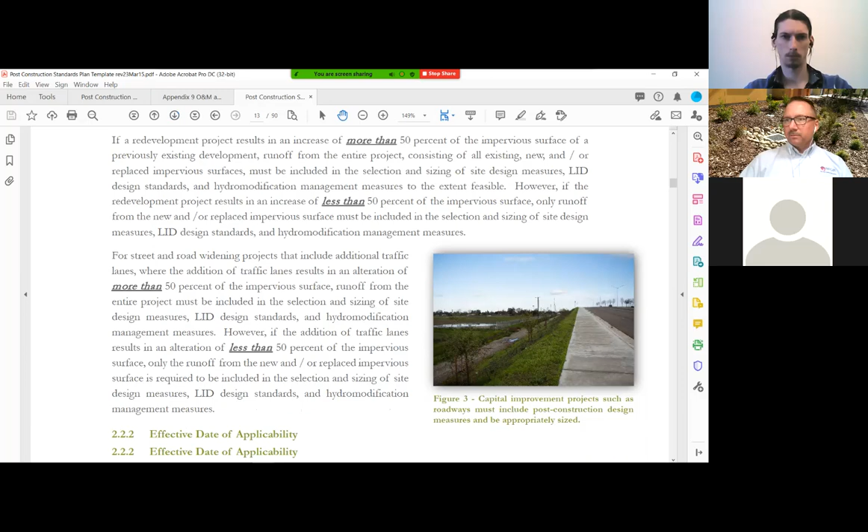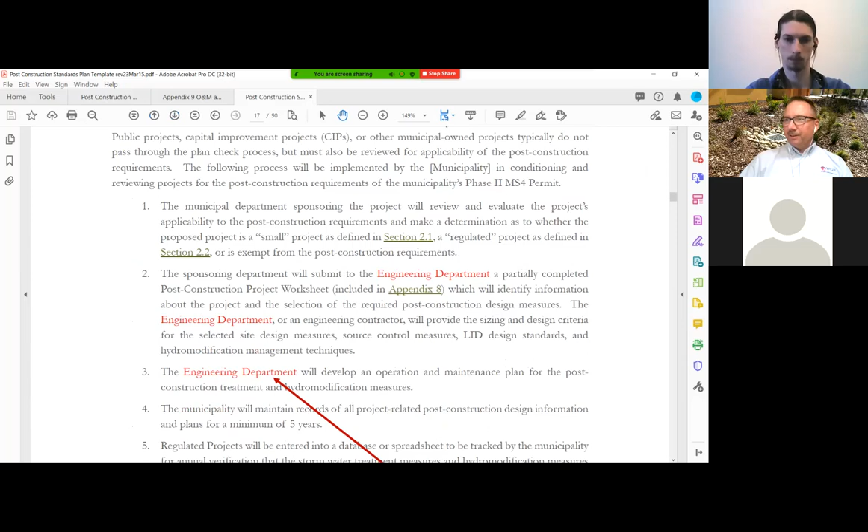Let me do something here. This isn't the city's official one, but it's just the one I had handy here. The city's looks just like this. Sorry, Rich. I should have had your official one up and ready to go. But let me get down to the treatment because it talks about it in here.

Volumetric calculations and flow-based right here. So right here's what I was talking about. Now this is Redding, and Chico's going to be similar, maybe not identical, but similar. If you pull up the city's manual and go to section 5.4.3, it'll talk about flow-based criteria, and it gives you 2 options. And the reason we gave you 2 options is because our permit gave us 2 options. It said you can either use 0.2 inches per hour or 2 times the 85th percentile storm.

And so I show Redding. Chico's not going to be too much different from that, but you notice 2 times 0.13 is 0.26. So that would actually be a higher goal to meet than 0.2. So that's why I said in Chico, even though the calculator's offline right now, you'd probably go with 0.2 anyways, because it's going to be more favorable for you. Does that help? Okay, that makes sense.

Now going back to the volume based, I believe if your project's over an acre, I think it's in section 5, about the hydromodification goal, post-construction? Yes, yes. It's right here. So next page, I believe. Right here. Yeah, here we go.

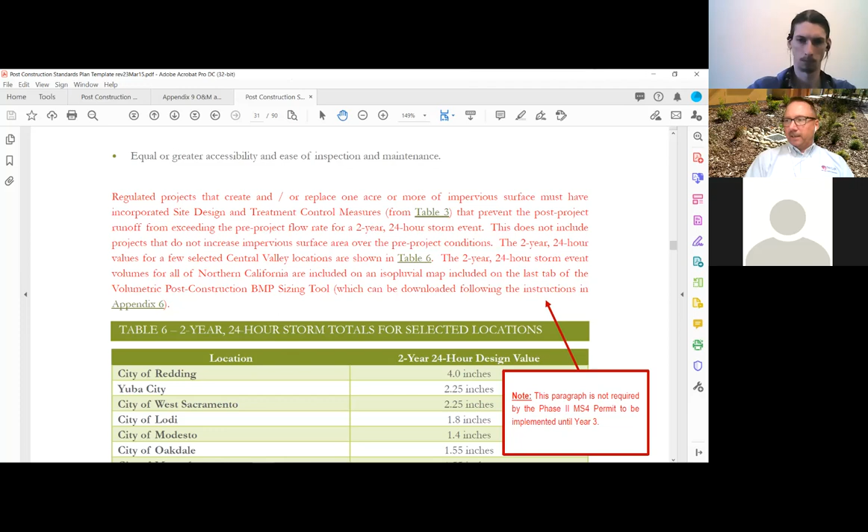If you are creating 1 acre or more of impervious surface, then your post peak flow rate has to be equal or less than your pre-development peak flow rate for that DMA, or for each DMA that applies. So you would go look up the 2-year 24-hour for your area and calculate your peak flow rate for that DMA, and compare your post to your pre. And your post mitigated cannot be greater than your pre.

So your post might be greater because you're adding a bunch of asphalt, but it's going into a bioretention area, and maybe that bioretention area is able to capture 100% of a 2-year 24-hour event, and therefore your peak flow rate for a 2-year 24-hour event is going to be 0 for that DMA. So you've met it. What if you have an underdrain pipe? If you have an underdrain, then what I've seen people do is include an orifice and provide calculations on that. Okay.

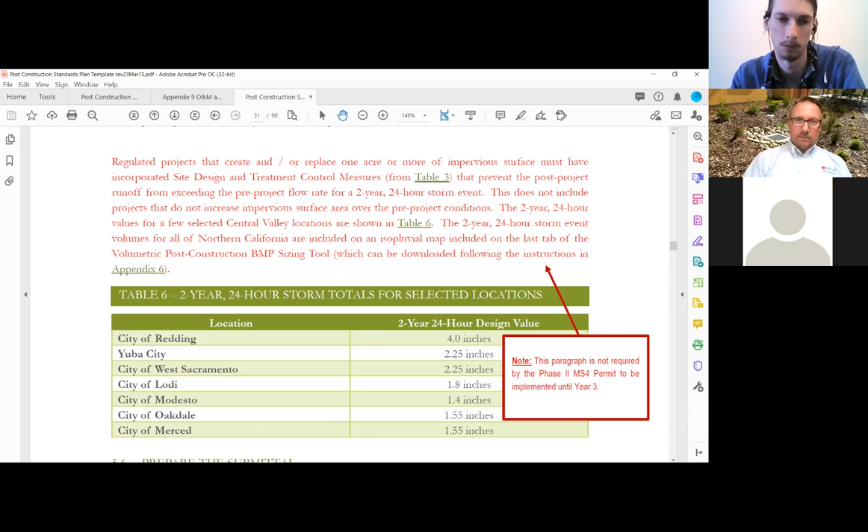So that 24-hour, that's not the 24-hour intensity number? Like if you went to the Atlas, assuming it was working, they have this little list of all the intensities per time interval and return period. Right, they have intensity and they have volume. You're right. Well, you can use whichever figure you want, but what we're really looking at is your peak flow rate based on your time of concentration for your particular DMA. So however you want to get to that, I'm not so concerned whether you use volume or intensity, but how you determine it. Okay, that answers my question.

All right. Any other questions? Keith, I know you got questions. You always got questions for me. Are you still there? Yeah, not today, I guess. Not today, huh? Keith and I go way back. We've had lots of discussions. All right.

Go ahead. I have a quick question for Rich. This is Josh again. With the O&M plan, a lot of times, or at least for the project you were just seeing, the ownership switches hands after the project is approved or we have permits. So it's kind of a catch-22, because I can't provide a

Sure. No, I understand. Give us the title report and everything for the current owner. We put a hold on the certificate of occupancy. So if it does change, which does happen, we find that out, and then we can go to the current owner and get a new title report and deal with that. But we have a catch on it, so if it does change ownership, we still get what we need. So just supply information for the current owner, and we'll go with it. Okay, thank you.